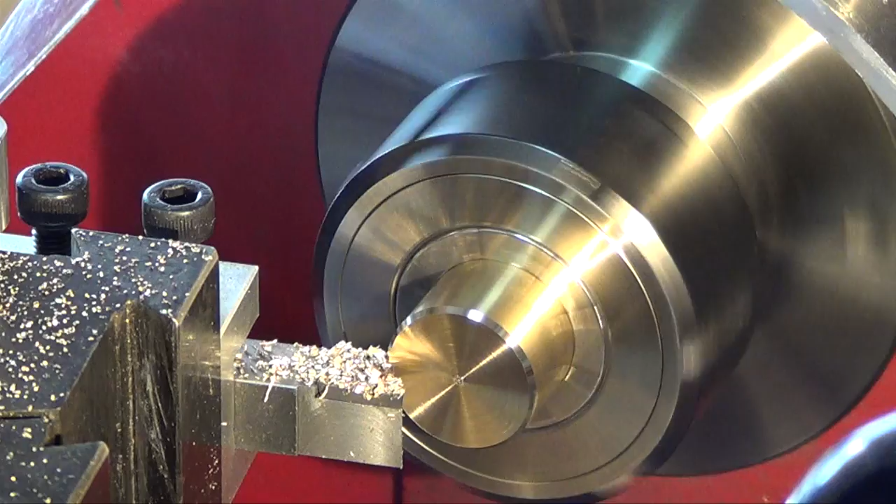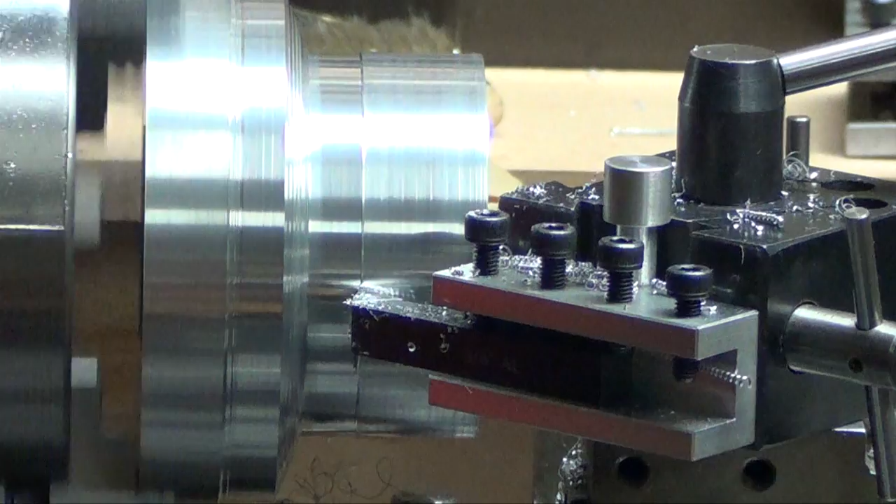Whoa, just finished running my hands under hot water so I could feel my fingers again. And they're getting cold already, so I'm tired of this weather.

Okay, for this video, I can't tell you how much fun I'm having making gears and diving into it. But as I mentioned, I want to make the 25 tooth gear so I can have these two main gears replaced with metal, get rid of the plastic. So I did some brainstorming with Pierre of Pierre's Garage up in Canada, and the conclusion was the only way I'm going to make a 25 tooth gear is I have to make a custom spindex plate, which is right here.

So this is a two-part video. I wish it was one, but even this one is really long. So this one I'm going to show making the blank plate, and from it you'll see how I'm pushing a mini lathe to the limit, because this is a 4-inch piece of stock that I made this from, so maybe you'll pick up angles and how I did it.

Then the next part, part 2, will be actually drilling the holes, so you'll get to see how I do this in precision. It's like within a thou, and it's done on the other mill with the BluDRO and the hole circle function. So hope you enjoy it, but I begin with what I should have done in the first place, which is look at the entire overall picture of what's involved in making gears before you even make a decision to take this thing on. But I'm in it, I'm having fun, so I hope you enjoy the video.

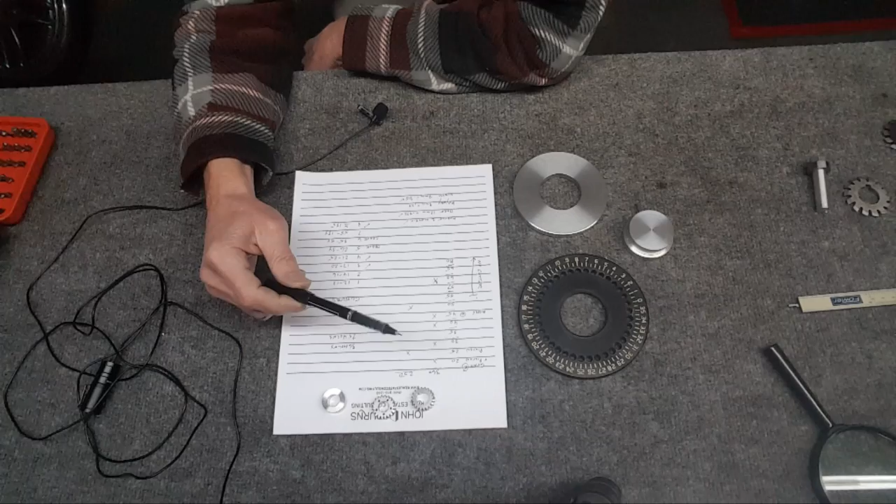But in any case, there is another gear that is a 20 tooth. It's actually a gear, and I've got a K here, because I haven't finished this. K means it needs a keyway. So I'll have to broach the little spot here for a keyway. But that gear they don't offer in the change gears because it's metal anyway. So that's the one that I talked about at the end of last video saying I want to make another one of those because I want to make sure it's got the relief angles, everything to it.

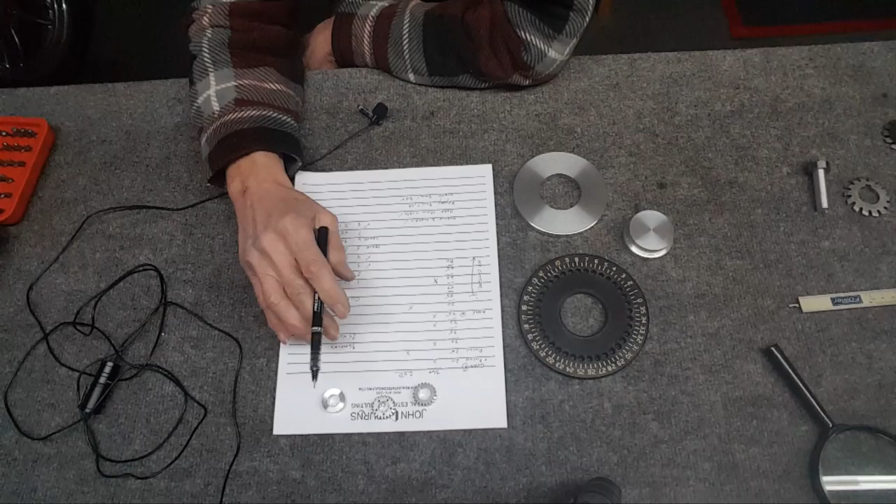So in any case, I'm figuring out, here's all the gears that are in the whole machine. Which ones can I make with the existing 360? So here's the X's by them. 1, 2, 3, 4, 5 gears is all I can do on this. So if I wanted to make another plate, I'm looking at this going, oh yeah, for some reason I came up with 72 holes. I don't know where I came up with that number now, but then I'm looking at this plate going, wait a minute, it's only 36 holes here.

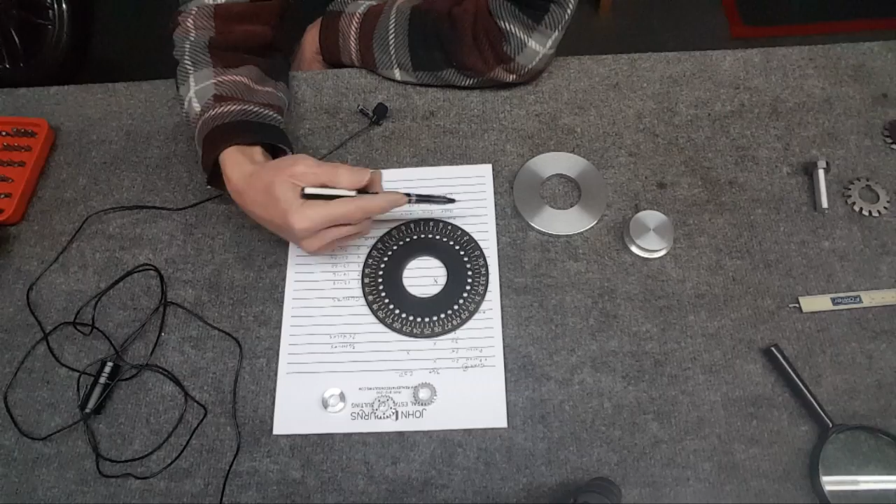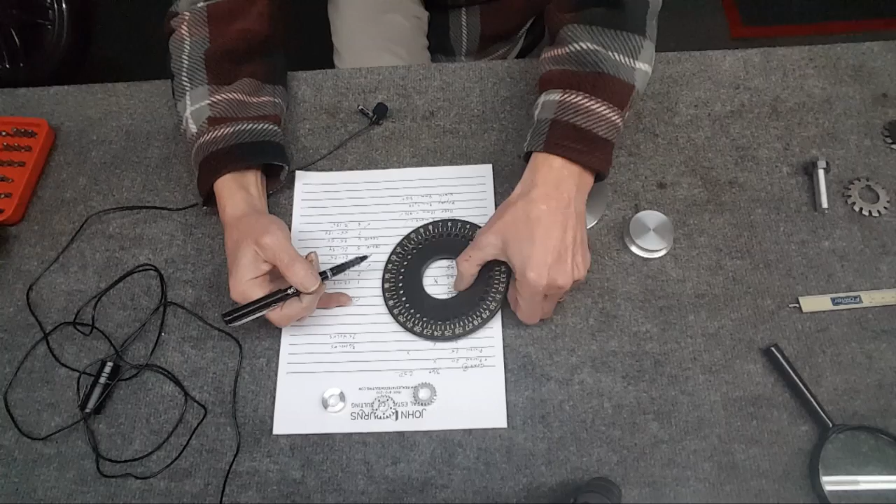So, and they're really close to one another, so you can't go more than 36 holes. You probably could get a few more in there. So I'm realizing I can't drill 72 holes in this plate. So the best I can do is probably 25 holes, which would give me 250 degrees because there's the little 10th increments in there. What can I make with a 250 plate? 2 gears, the 25 and the 50, that's it.

So I'm invested in this thing. If I would have done this in the beginning, I'm not sure if I would have even attacked this or not, but as it is, I'm invested $20. This gear I got, but I didn't realize the Banggood site was broken. No matter what you put in the cart, you wind up with this 135 gear. So I'm not counting that. That was 10 bucks thrown in the trash can. So I'm into it for $20.

I can do 17 to 20 and 21 to 25. So that's these 2 gears I can make. And I'm figuring, well, what the heck, since I'm in it, I put these other 2 gears on order, or cutters. Because the 12 to 13 I'll never use, 14 to 16 I won't use, 55 to 134, nah, not. So here's $40 invested, plus the material for this and the time.

To make 2 gears, I was on LMS. 20 tooth gear in metal is 12 bucks plus shipping, and the 25 is 12 bucks plus shipping. So $24, and I was into it 20, all right. But the cool thing about the LMS site is the change gear sets. They did label them as module 1, yay, so I got it right.

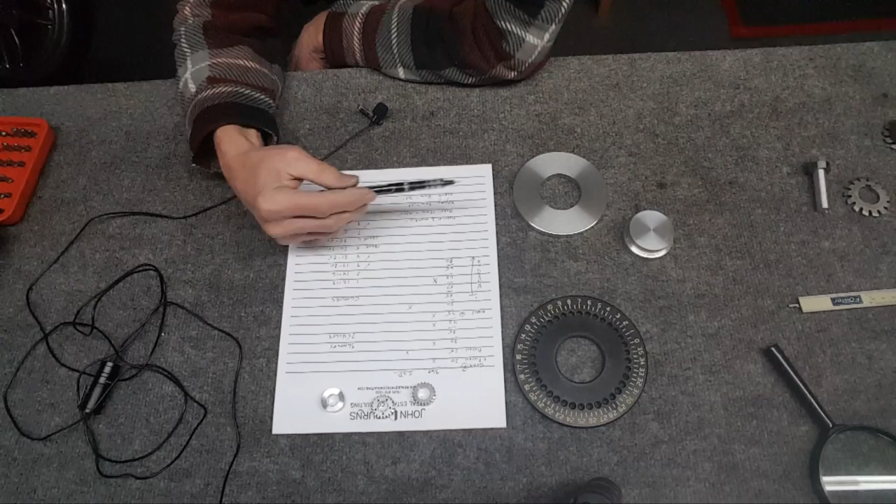And so where am I now? I guess since I'm in it, I might as well buy these 2 gears because there are other gears in the apron that maybe I can make. I think I can. I don't know. I haven't looked at what their pitch is or anything. So I might as well invest in this so I can make whatever I want, you know, $20 more. And then I'm going to make this plate with, I guess, 25 holes, so I can make this 25 gear that I was interested in.

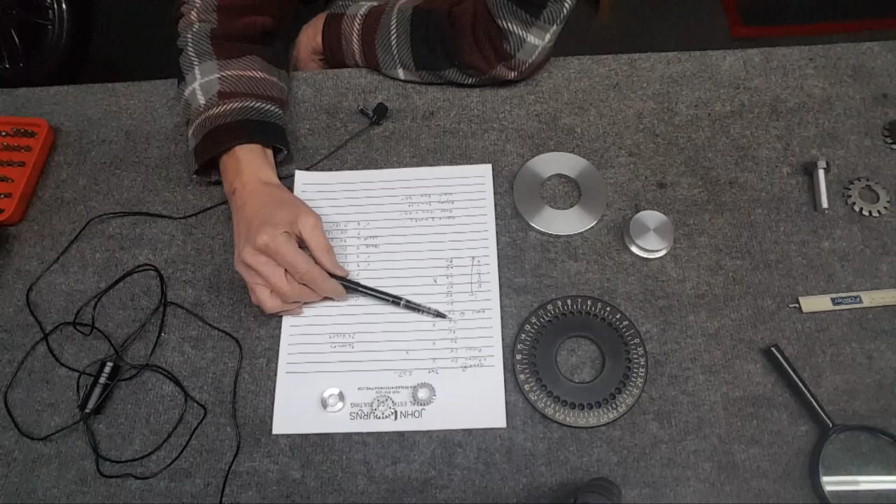And since I've got the 2 mini lathes, I have 2 complete sets of plastic change gears. Also, yeah, the one I want to make is the 2 plastic gears, the 20 and 25, that are up by the spindle, drive this one plastic gear that's underneath a cover. Half of the gear is covered up. That's a 45 tooth gear, so I do want to make that, and I can make it with the 360. So I'm going to wind up making 20, 25, and 45, and then call it quits.

The big one, one of them's kind of wiped out. The center bore is kind of messed up. So I'm running on another one, and I might make the 80 someday, but I would have to make another one of these plates to do it. So hindsight, here's all the cutters. You have to buy them one at a time on the Banggood site. Be careful what's in the basket, because you might be at the bad one, where it's always going to put number 8 in your shopping cart. And these are all the gears.

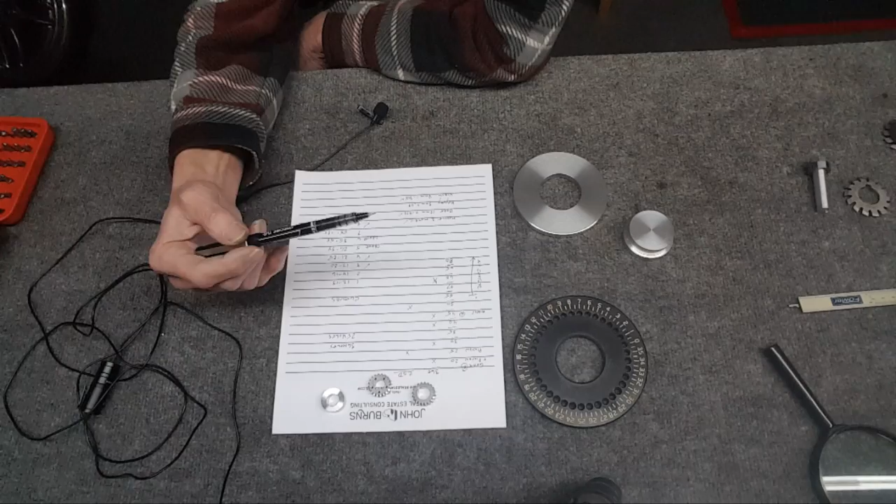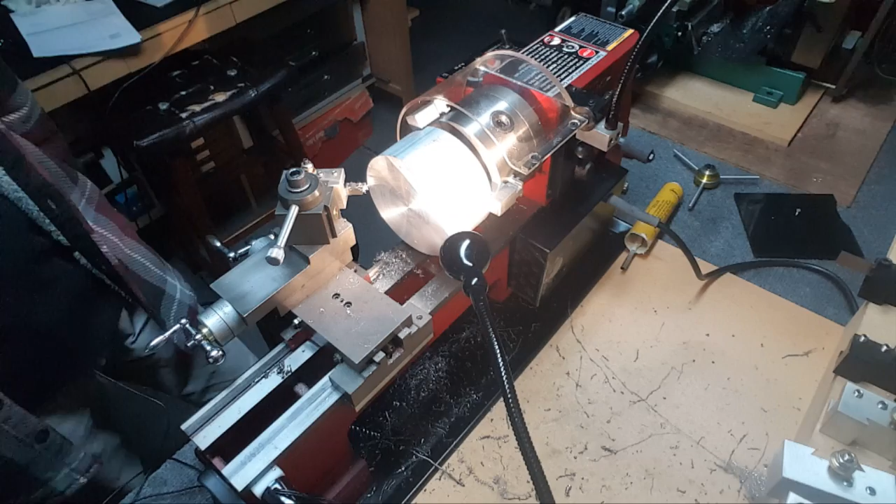So on with this video, I'll show making this guy and what I'm doing. This is really pushing a mini lathe to its limits to try to be able to do that. That's a 4-inch piece right there. You know, I can't really hold it, but it's right on 4-inch. I went through the junk bin and they had a bunch of pieces under $3 a pound for 4 1/4 inch, but I can't hold that.

So this just makes it in a 4-inch chuck, and it's what, 2 inches long. So this was pre-cut stock that they sell. They sell it what, 1 inch, 2 inch, 3 inch, 4 inch, so on. That piece ran $12.74, but so it's kind of a kick, turning it, angled everything to the max.

Get it to speed up there, take it in, what? Oh, I'm not even touching, right? Yeah, no, I'm not. As I back it out once I hit center. There we go.

Kind of going as fast as I can here. And you can see the smoke, boy. It's putting out some heat. Problem is, too, the curls or whatever jam up, so I can't see the center when I'm done. I think I'm almost done with the cut. There, hopefully I'm done. Back it out. So, take me a bit to turn this.

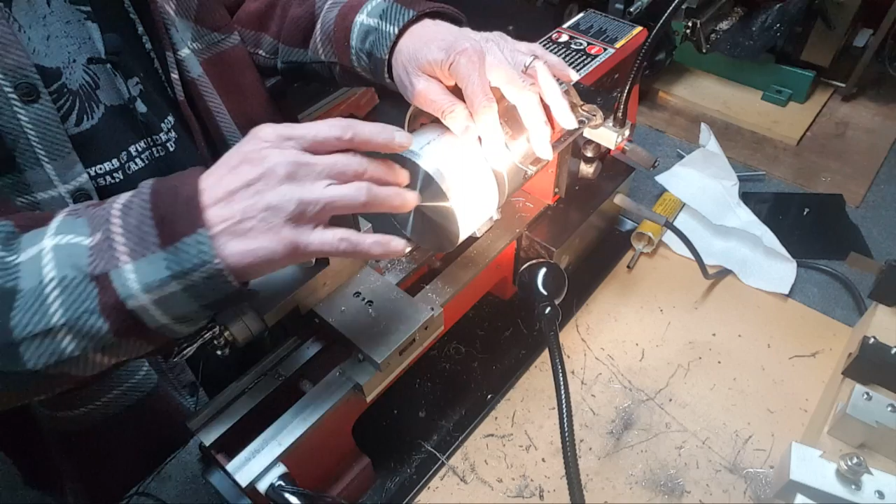We're in a couple of thousandths here. Maybe I need cutting fluid, I don't know. Put something on it here until I get it kind of round. Gee, that is strange. What's the finish look like here? I have a good angle. That is terrible finish, that's why. It's tearing it up. Insert was gone. A whole different finish now. I'm using my steel cutter rather than replacing that.

I probably should go in further than this. Yeah, quite a bit further, huh? Go in a few thousandths here. Come on, okay, there you go. So, chip's coming off. You can see it's pretty nice finish even for just a junk insert. This isn't an aluminum specific insert. Oh man, it's throwing junk all over me, sticking to my shirt. So just a matter of turning this thing down now.

Done, I guess. Pretty nice finish here for a steel insert, a generic one. Chamfered it. You can see the angle here. Just change the angle, come in and just clean up this edge. So now it's a matter of just taking it over to the bandsaw. I've got just under a 1/2 inch here of cut. So I need a 1/4 inch plate. I'll probably saw it off right here.

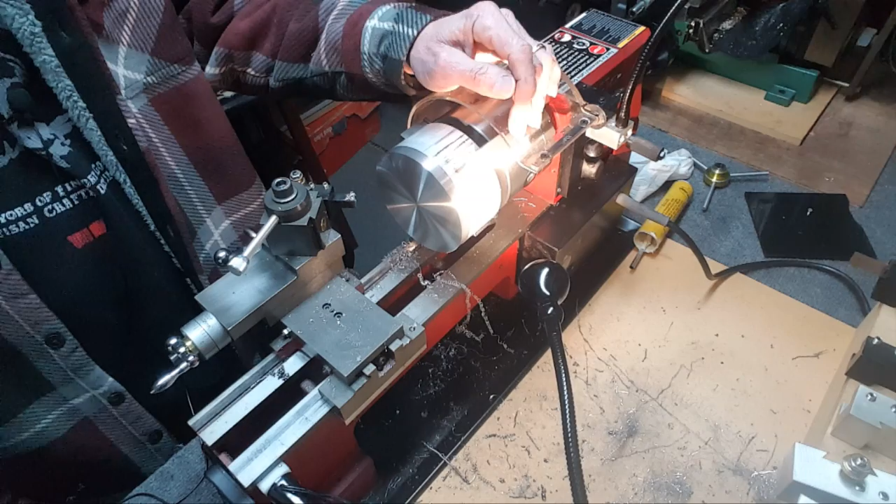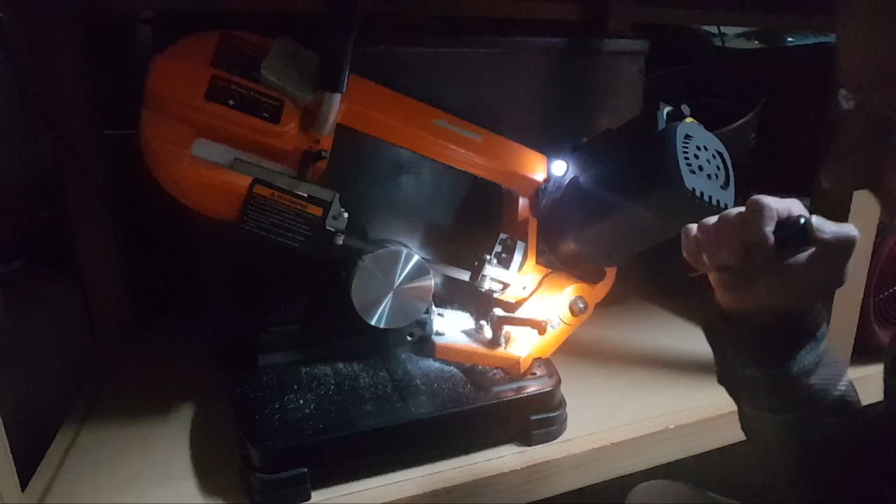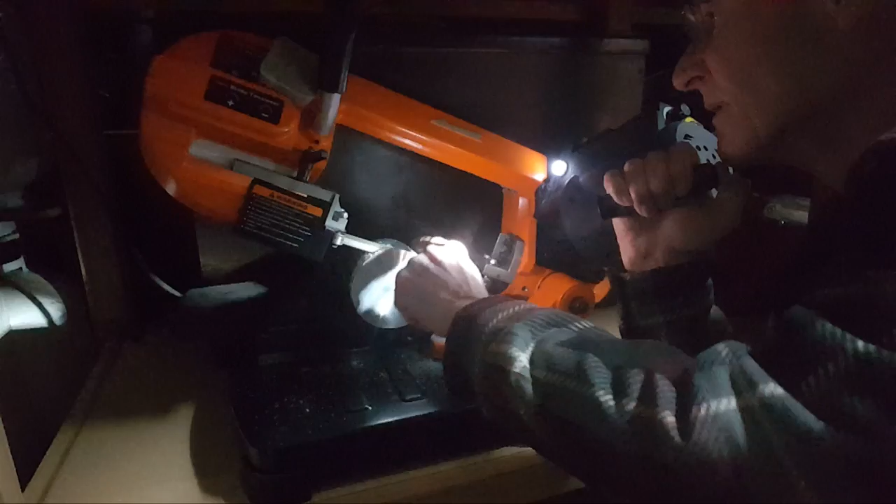Well, I guess bring the ruler back over, just measure the spin indexer and see how thick a plate I can get. Otherwise, I'm going to have to put spacers back here. I need to get a light over here so I can see what I'm doing, but you can see it's cutting it. I've got a piece of wood just stuck up in the handle and a weight over there. So, and on the slowest speed, but it's staying right on the correct cut. Dangerous sticking your finger in there, but as far as I can tell, it's doing it. It's gonna be a while.

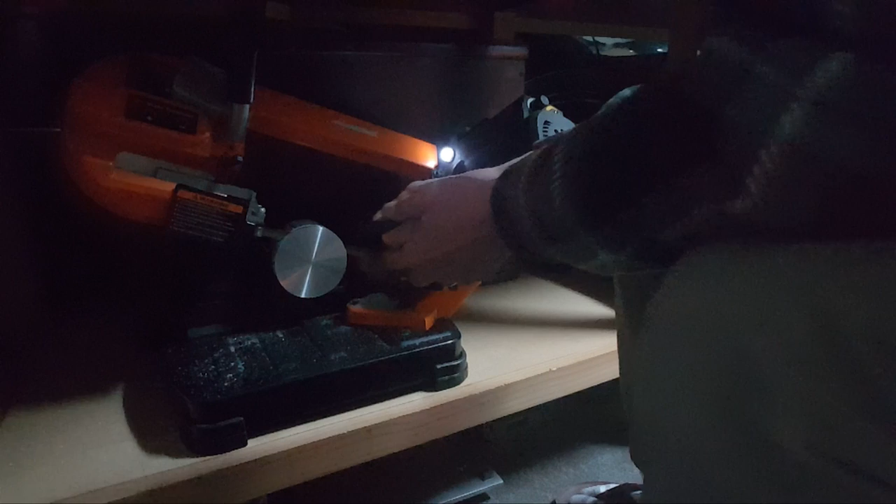Well, about 15 minutes here, and it's staying right on the line. When I turn this guy, where it ended is where I set the blade here, and looking at it over there, it's right on it. Because I was worried I had to back this guy up, and it can move this way. So you can essentially have a pretty crooked cut, but also I was thinking I've got enough material here that I can do this again, but turn it down further and cut it off to be able to make a 60-tooth gear or whatever I want.

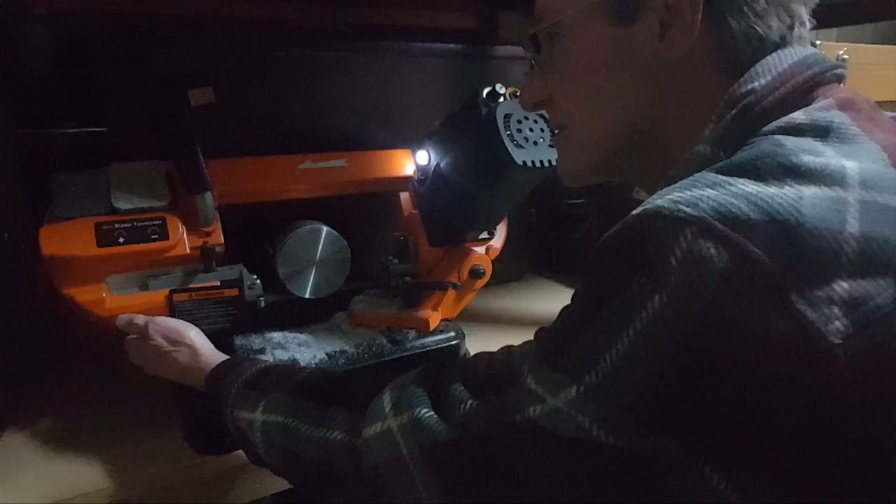So I could actually, wow. Boy, that almost seemed like that moved. Alright. So I know I can do it one more time in this vise, so we'll see. See how long it's been. I've had to shut it off sometimes because the noise just gets to be incredible. Take the extra weight off. It's very close. Yeah, it's starting to move. Right, how can I hold this thing?

There it is. Hey. Oh, wow. And it followed it all the way down. That's pretty cool. Alright, so I should be able to face this off. Really tempted to make another one, but I know that was at least 2 hours to cut that.

Oy, crazy. Spider to the rescue. As you can see, it's just barely hanging on to it. Almost done, and let me tell you, chips are flying everywhere here. So, do this for a minute. Pretty soon it's going to be that one long, ugly strand that's going to come around and nail me, huh? Taking about a 5 thousandths cut. Here we go.

Moving the crank almost as fast as I can. I can see something grabbed onto a chuck jaw. It's going to come around and slice me, but now I can't see when I'm done. So I gotta go by sound. Probably one more cut and I got it, huh? Hey, chatter.

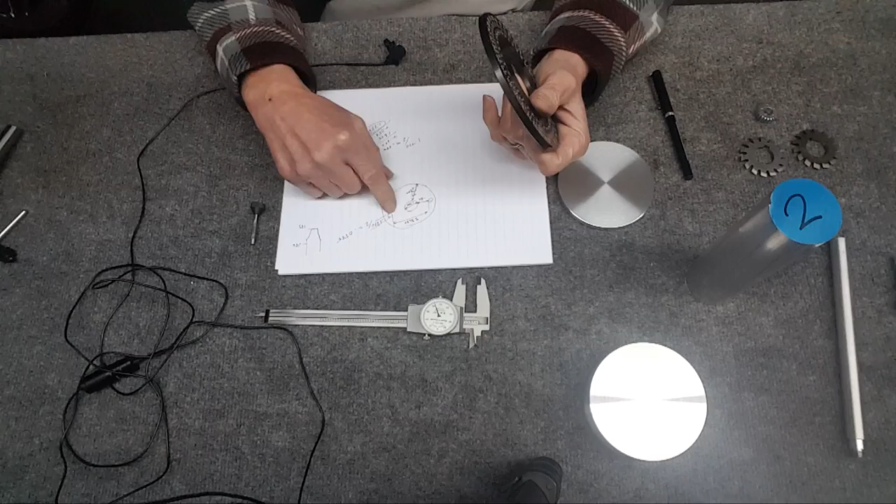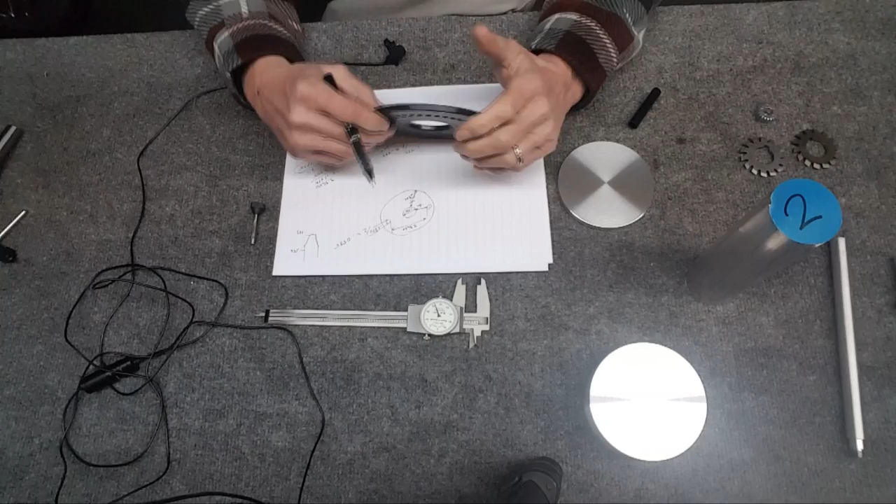Got this guy off and starting to figure out what in the world I'm going to do here. First thing was I tried measuring this, and I figured, no, let me just caliper the spindex itself. It's a machined surface. The surface that this thing sits on here is well machined and shiny and ground. And this was a tight fit. You had to finagle it a bit to get it off.

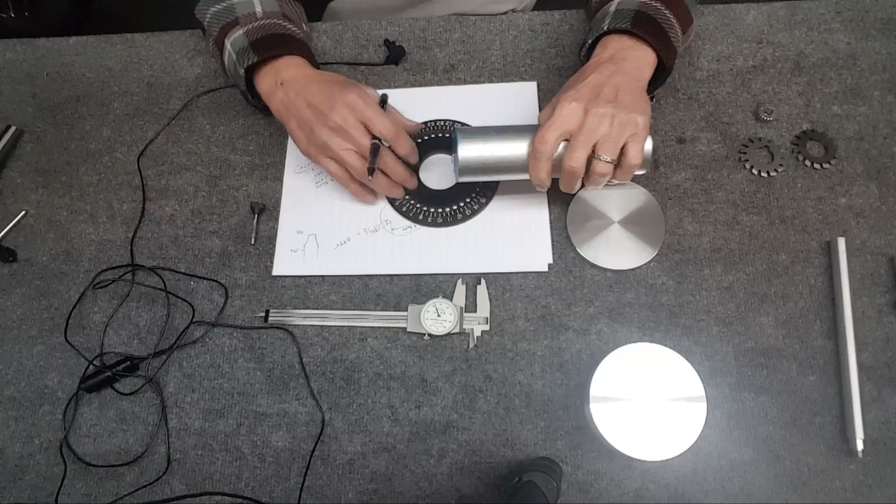So the idea is I want to put this back in the chuck, drill, and then bore it to this, but I want to make sure I got that good a fit too. So 2-inch piece, I'll cut off some, and I'll make sort of like a gauge pin, a go, no go with this. I'll sneak up on it until this guy just gets on there. So then I'll have that I can turn this with, start boring it, and sneak up on it, and make sure I've got it right on the money.

That would be done. Now, the next thing to do is took the gauge pins, and these holes are all over the place. Some are bigger, some are smaller, and this guy is somewhat coned, which I've got here. 183 thou here, 196 thou there. And they're also funneled. No, actually, you stare at it, and it's just countersunk, chamfered. And it's a straight hole, but they've got holes of different sizes. There's some that are bigger than others. So I'm not sure what drill bit I'm going to use yet. I do have all the different sizes.

So first thing I wanted to do is, of course, you got to figure out what the radius is. So I tried 2 different techniques. I measured, found a gauge pin that kind of fits everything here. The smallest hole, and it's 187 thou. Divided by 2, and I got 93.5 thou.

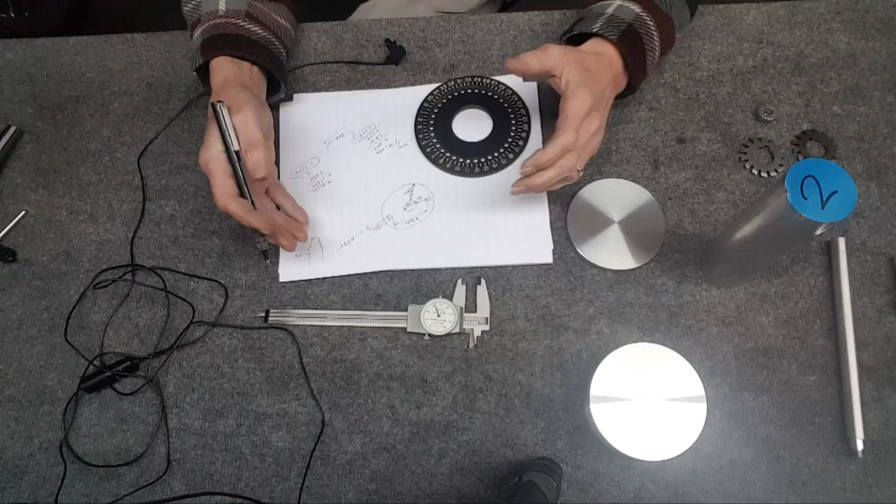All right, so I know this dimension perfectly, and I measured 2 methods. One, I measured from here to here as carefully as I could with the caliper going across, and I got 3 inches, 368 thou. So I know the gauge pin, and I know that, so I'll know center to center divided by 2. Yeah, this was it. So the radius, according to this method, is 1 inch, 777.5 thou.

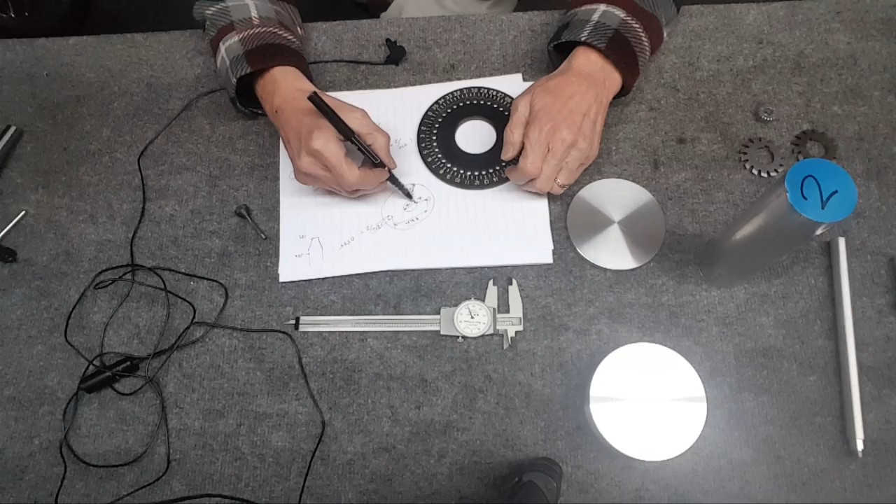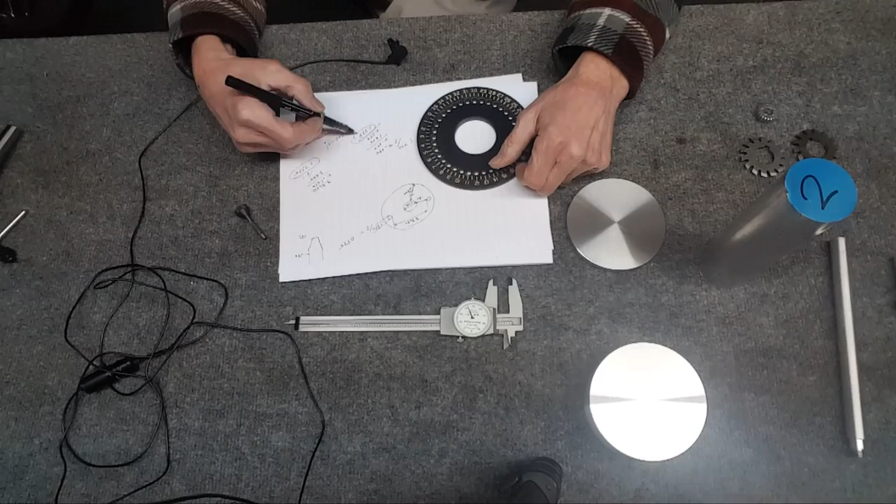Second method was, I know this, so as best I could, I measured from here to here. So that's the inside here to this. Came up with 800 thousandths. So you run the math on that, and I came up with 1.778. So I'm a half thousandth difference. So my radius is going to be 1 inch, 778 thousandths.

And I was even thinking, all right, what if I am off? I'm not going to be off this way. I'm going to be either too far out or too far in. And what's going to happen is, I just use this for an example. Say they're on, but if I'm off, the hole gets a little bit smaller because you've got this edge here to this edge. I can always make my own pin a little bit smaller to fit it. So I don't have to care too much about where this radius is. I'm just going to say that's the radius and hope for the best.

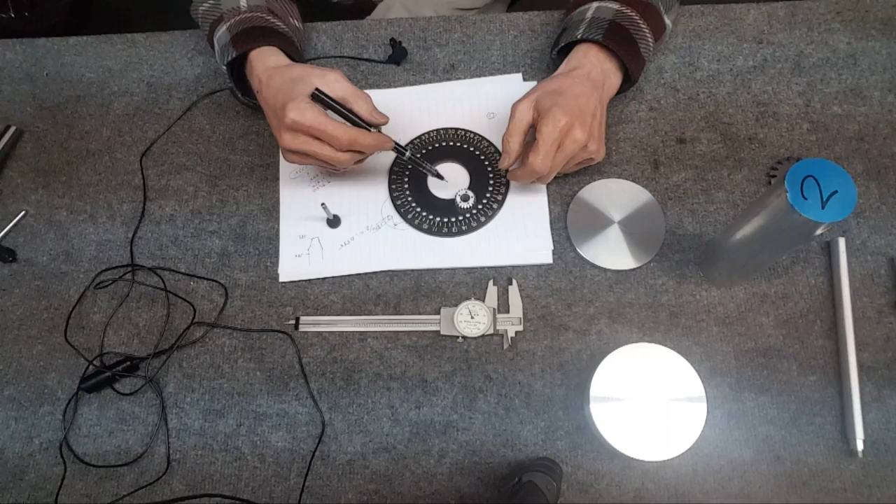I know its math, but the other way to do it is Little Machine Shop has an online calculator where it'll tell you the XY position. You give it the holes, the radius, the angles, and poof, you got it. So I think I'm going to use the other mill because I got more height, and I can use the coaxial indicator to actually be perfectly on center and then tell it 25 holes please at that radius. So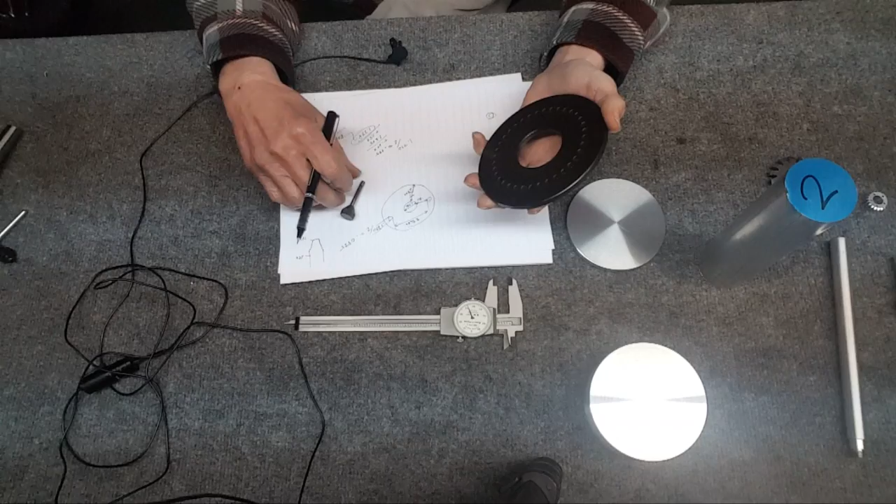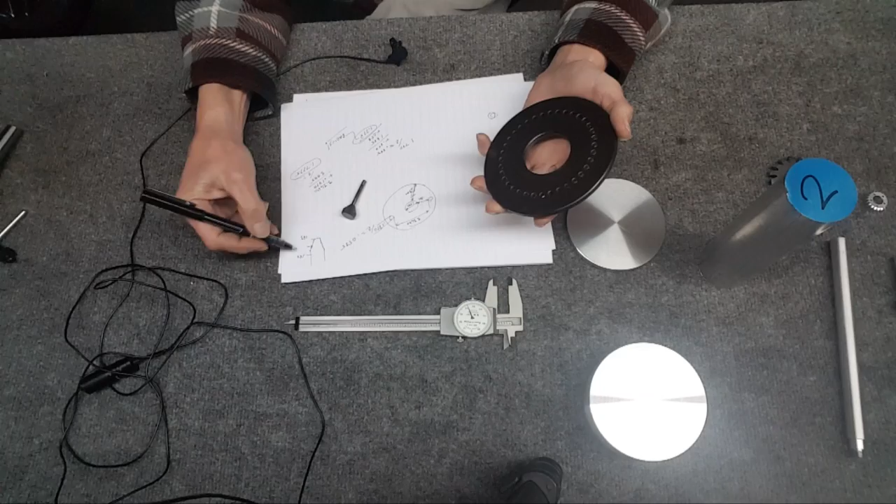I guess that's about it, and I just need to figure out what size hole to drill. I think I want to probably hit in the middle here, safe, which is about 5 thousandths different. This is 10 thousandths sort of between the two, because yeah, I did check it up here and I checked it down here, and that's 10 thousandths, so 5 thousandths on there. I don't know what bit's going to give me that 188 thou. What do I have?

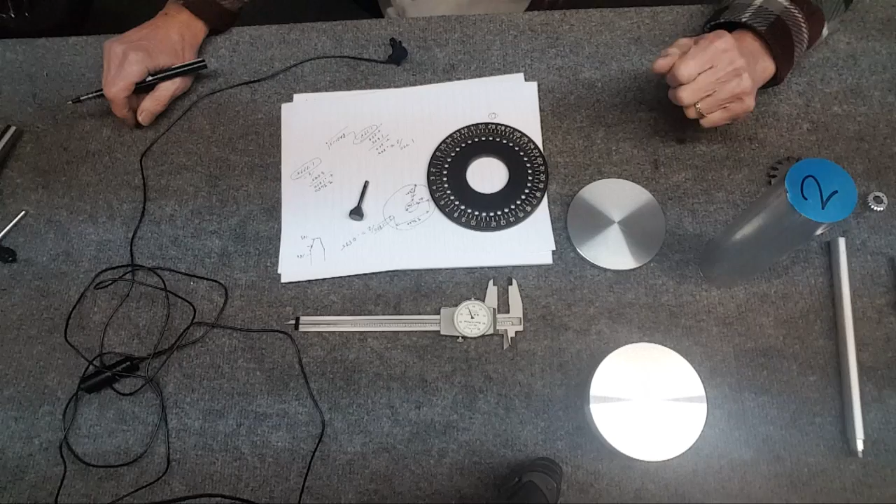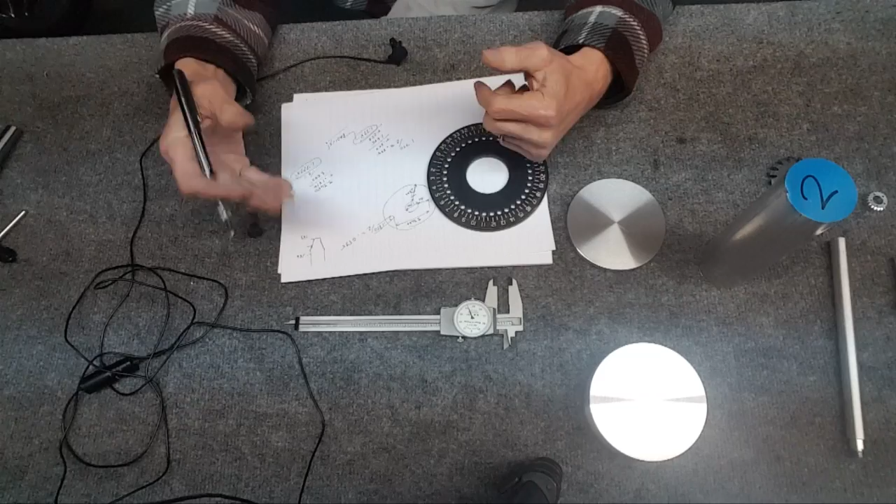1875, which is going to be undersized anyway when it drills it. So I don't know. I got to go through the metric set and the 1 to 60 set and stuff and see what I want to do. But that's going to be a lot of boring to take that out, because I'll probably drill it all the way up to a 1/2 inch and then start boring it out.

Okay, well, I guess I have to make my go-no-go pin first. Funny, some people were asking what tolerance you can hold on a mini lathe. I was going in 2/10 of a thou to get this to fit, and I'm right on it too. It's just snug as all get out. And it's right there. Eesh. So you gotta finagle it to get it in and out. That's pretty tight. Wow. Alright. So got my go no go gauge.

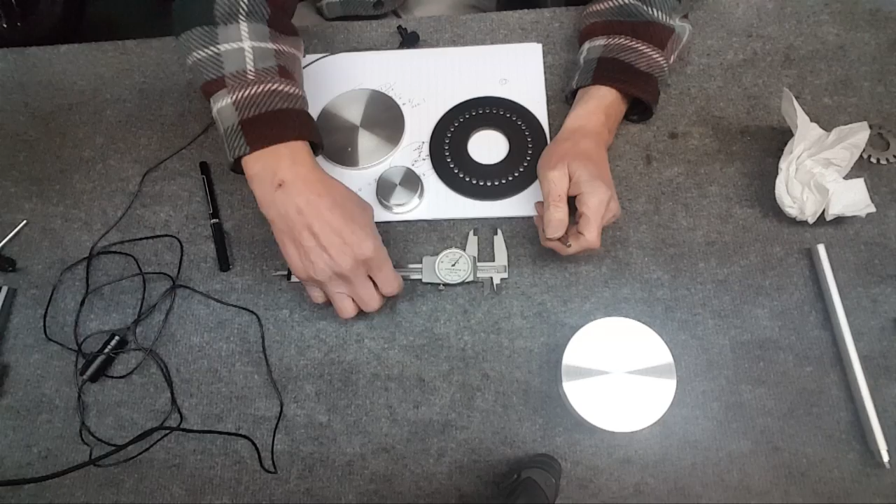Figured out why this guy is off. It's because it's freezing in the shop. It's 20 degrees below where it should be. It's even colder today than when I did this. That was 196 before. Let's see what it is now. Been kind of handling it. Yeah, it's a 1/2 thou, even lower than that. So yeah, it's probably good, but it's 50 degrees in the shop, and you should be calibrating it above 70. So, all right, so no-go gauge done. Time to get this guy done.

Boy, after hours and hours of boring a 1/2 inch hole into that, got it. Because this thing, go no go, worked beautifully. It just goes in there. And I already put it on the spindex, and it works perfectly. But what I just realized is on the mill I can use this guy, wind up clamping it down, or somehow put a hole through the middle of it, just a T-slot clamp. But I should be able to find and verify the radius that way. That'll be cool, huh?

How far did it go anyway? Put this guy on there first. Drop him there. This guy on there. Boom. Covers the holes. Not by much, huh? It looks like it's just to the edge of these lines, so I'm just barely gonna make it here. That's a kick. All right, so now the real fun begins after days and days worth of work. If I screw up the holes, I'll give up, I guess. I don't know. Okay, over to the mill now.